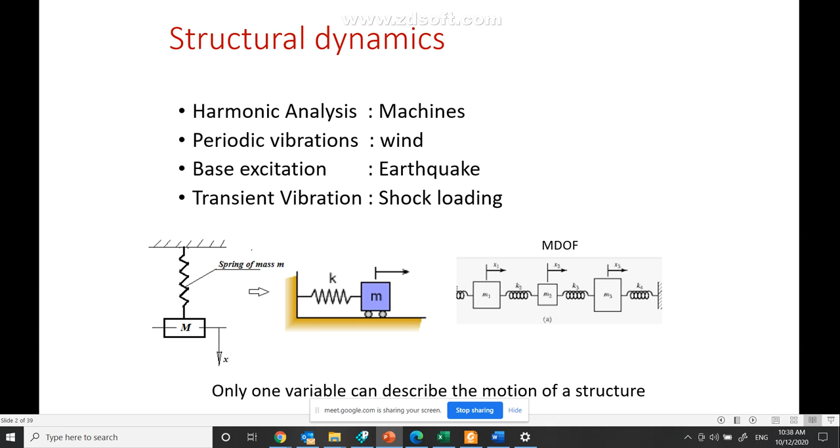If the masses are more and springs are more than 2 masses and 2 springs, then we define it as a multi-degree freedom system.

Now the classic example of a single degree freedom system is an elevated water tank, which we have shown in the example. If it vibrates, it can move on the right hand side, it can move on the left hand side to a given amount of vibration. This movement can be represented as a spring mass system.

The mathematical model of this elevated water tank is a spring mass system where the mass is moving left and right. The assumption is the mass is situated at the top and the column has only stiffness. The column mass is negligible compared to the mass of the water tank. So we have a spring which gives the column stiffness and the elevated water which acts like a mass, and that is the way I have represented the spring mass system.

If I look at the free body diagram of the mass system itself, then you can find out the various forces which are acting on the mass.

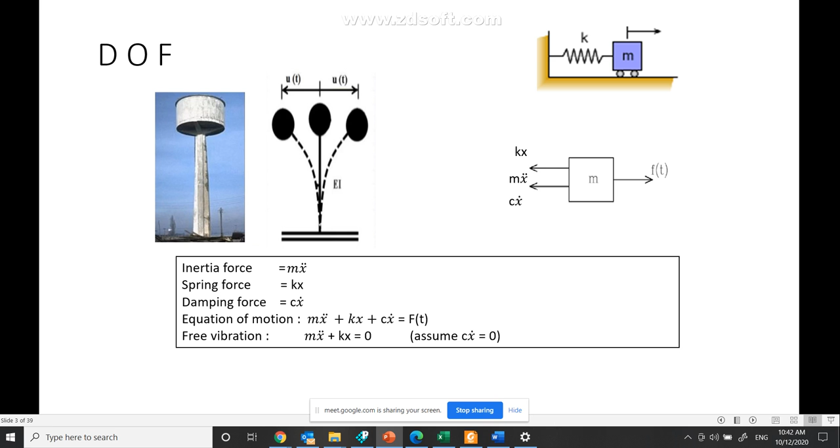Now, if I divide by mass, then I get x double dot plus k by m into x(t) equal to 0.

Now I can assume that omega n is under root k by m. This is a constant I am assuming, and if I substitute it in the above equation, we get the equation x double dot plus omega square x equal to 0.

Here, x double dot and x are functions of time only. And since it is a single degree freedom system, we get only one variable, x. This equation is a simple harmonic motion.

The angular frequency, or circular frequency, omega, is equal to under root k by m, and the unit is radian per second. Similarly, the linear frequency can be written as omega over 2 pi, and the unit is cycle per second or hertz, and the period, t, equal to 1 by f, has the unit second.

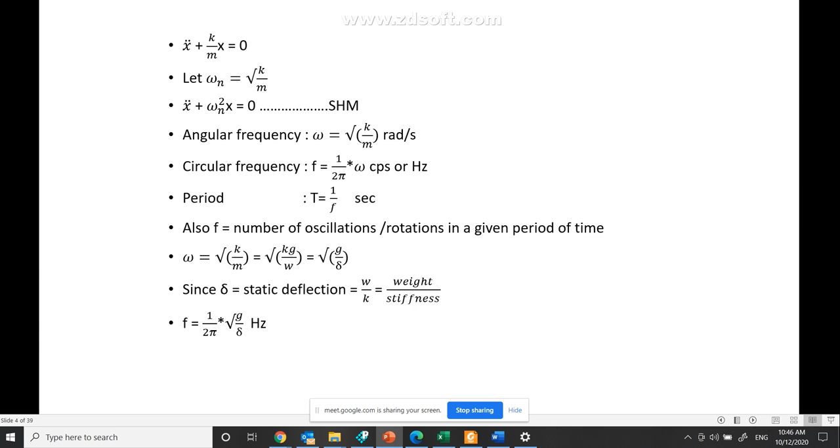Okay. I think there is one slide which is missing, because this is in case of... okay, before you go, there is something.

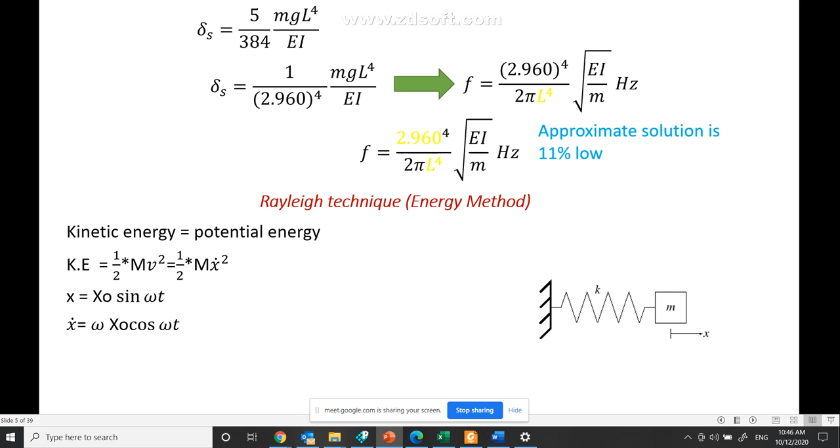Okay, I think there is some problem in slides.

Determine the fundamental frequency. For this problem, the concentrated weight given is 7,000 pounds at the mid span. So we can find the mass, which is weight divided by G, which comes out to be 18.12 pound-second square divided by inch.

The stiffness can be written as 192EI over L cubed, which comes out to 288 into 10 to the power 3 pound per inch. The circular frequency omega is calculated as square root of K by M, equal to 126 radians, and the frequency can be given as the period equal to 0.05.

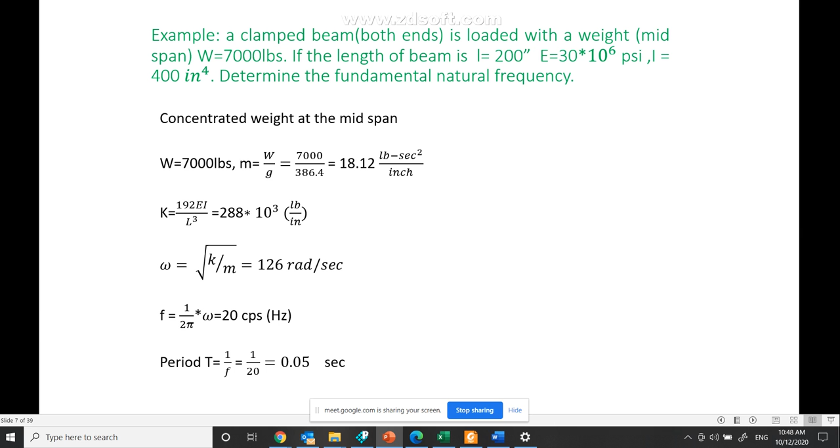In this case, it is assumed that the clamped beam has stiffness only, and the mass is concentrated at the center point, which is nothing but the weight. So we can calculate the frequency.

Now we are trying to calculate — normally the equation I wrote is for a single degree of freedom system. In a multiple degree of freedom system, the equation becomes a mass matrix multiplied by the acceleration vector plus a stiffness matrix multiplied by the displacement vector equal to 0. This is the equation of free vibration for a multi-degree freedom system.

Using the finite element computer program, we normally calculate the masses as a lump mass or consistent mass. So we should know: if I am using the lump mass system, what is the frequency? If I am using consistent mass, what is the frequency?

This example I am showing is a bar, not a beam, shown as a vertical force. It's a bar which has a lump mass, and I am considering only one element.

So stiffness of the bar is AE over L, with matrix 1 minus 1, minus 1, 1, times U1, U2, where U1 and U2 are the deflections at node 1 and node 2. Similarly, the lump mass is equal to omega square into rho A L by 2. Rho A L is the total mass of the bar — rho is the density, A into L is the volume, and volume multiplied by density is the mass.

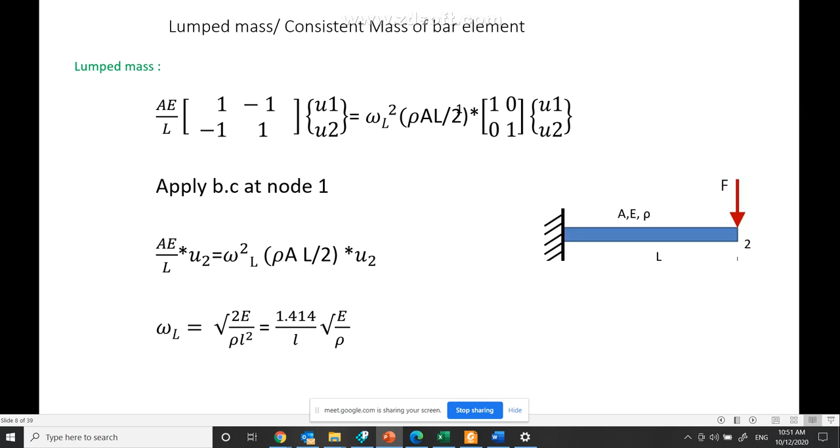By applying the boundary condition, we get this equation, and from this I can find omega, the circular frequency, when using the lump mass system: 2E over rho L square, which is 1.414 divided by L times square root of E over rho, the mass density. We can go to next.

Now, if I use a consistent mass, I only have to change the mass matrix. The stiffness remains the same. This is again a standard eigenvalue problem, where stiffness into the displacement vector equals omega square times mass into the displacement vector. So the consistent mass is rho A L over 6, with matrix 2,1,1,2, times U1, U2.

If I apply the boundary condition at node 1, the first row and first column from both sides are deleted. If you delete that, you get the equation AE over L multiplied by U2 equals omega square times consistent mass matrix. The frequency you get corresponds to using the consistent mass.

Rho A L divided by 6 multiplied by 2 multiplied by U2. From the omega consistent, I can calculate it, which is 1.732 divided by L, times square root of E over rho. The exact solution for a fixed free bar is 1.571 divided by L, times square root of E over rho. Thus, this shows that consistent mass overestimates and the lump mass matrix underestimates the natural frequency.

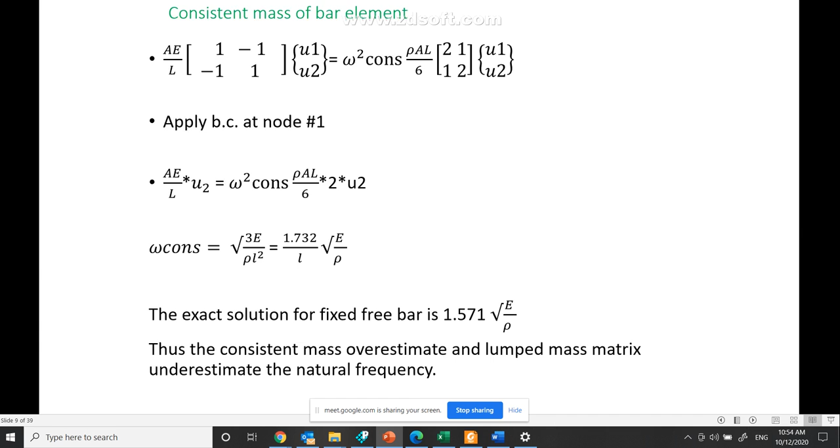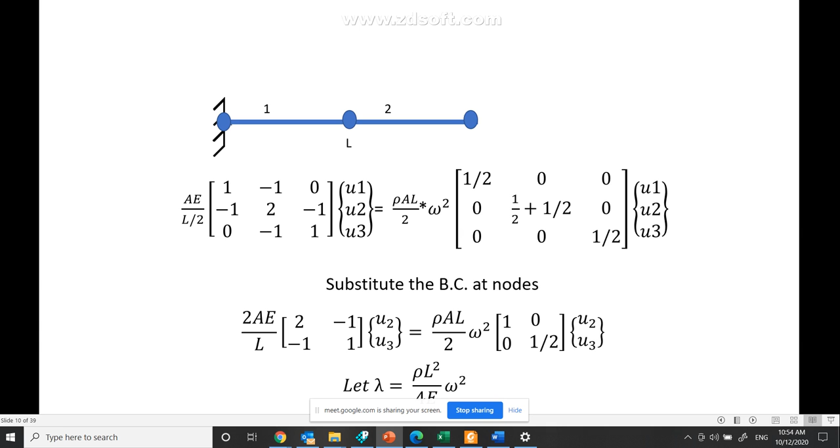Now I can use two elements, and the same kind of conclusion can be drawn. Here the two-element stiffness matrix is shown, and on the right hand side, two element mass matrices. Now the first row and first column are deleted from left and right. You get two equations here, and if I solve that equation...

If I solve this equation, I get omega 1 and omega 2, which are 1.531 and 3.695. The first fundamental is lower and the second fundamental is higher frequency.

Now, one thing is clear: if I want to have one frequency, then even the entire bar can be modeled as only one element. If you want more than one frequency, you have to use two elements for two frequencies, three elements for three frequencies, four elements for four frequencies. For higher modes, if you use a large number of elements, you will get frequencies more than one, more than two.

Similarly, using consistent mass with two elements, applying the boundary condition at node 1 in the same way, and assuming lambda equals rho omega L square divided by 24E. If you substitute it, then you can calculate.

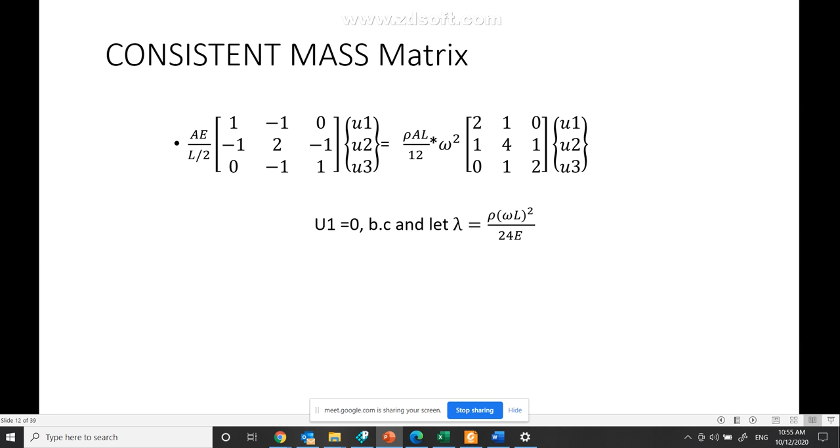Lambda 1 equals 0.108, lambda 2 equals 1.32. And omega 1 you can calculate as 1.61, omega 2 as 5.63, and the exact one is i times pi over 2L, times square root of E over rho, where i equals 1, 3, 5, 7 up to infinity.

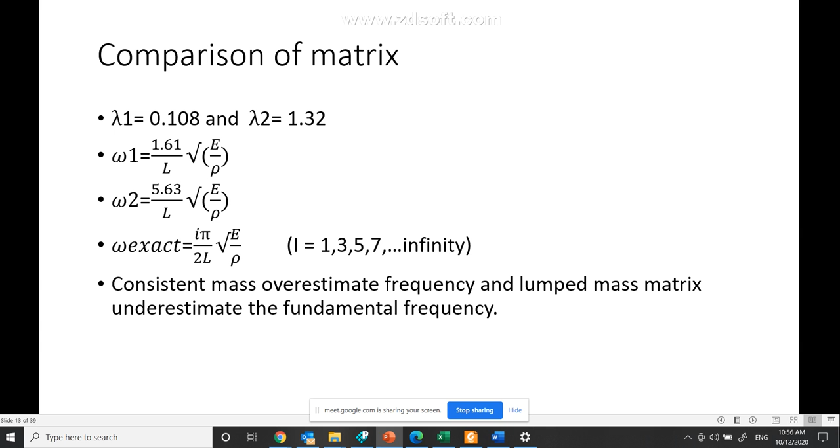This also shows, for two mass matrices, if I assume two elements, it also says the same thing: the consistent mass overestimates the frequency and the lump mass underestimates the fundamental frequency. This is true in case of one element or higher number of elements in a bar element.

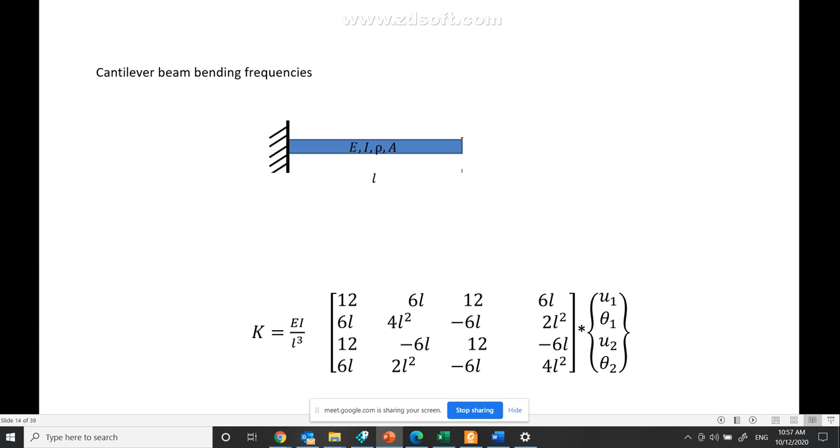Next, if I take a beam element now, instead of a bar, using only one element, the stiffness matrix is this. This is a long beam, with each node having a displacement and rotation, 2 degrees of freedom per node. So we have a beam with two nodes, one element, giving a 4 by 4 stiffness matrix and 4 displacement vector: u1, theta1, u2, theta2.

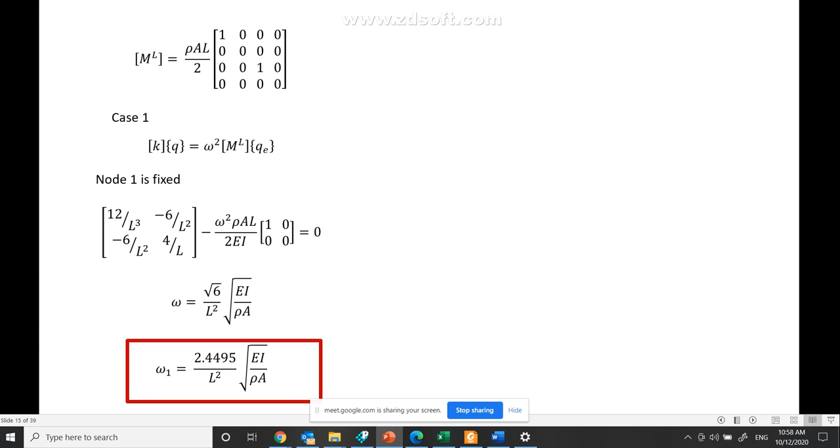Similarly, I can write down the lump mass for two elements for the entire beam. The case one equation is basically for lump mass, which is the standard eigenvalue equation that I told earlier I would explain. If I eliminate the node 1 degrees of freedom, u1 and theta1, we get the equation omega equals 2.4495 over L square, times square root of EI over rho A. This is the first fundamental frequency you get.

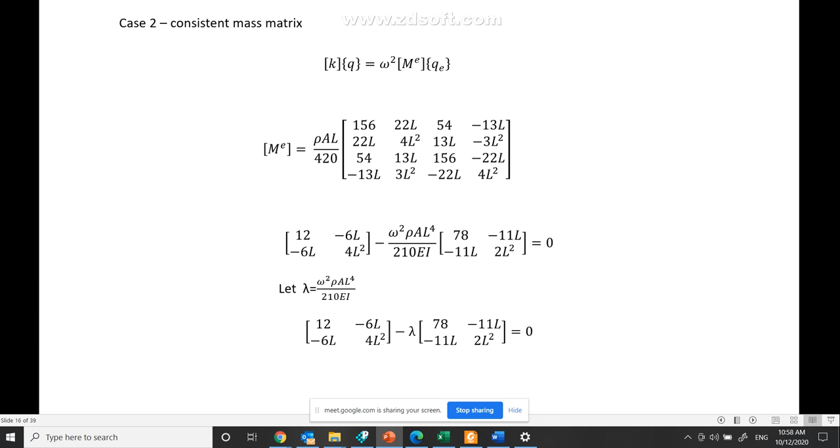If I take the consistent mass matrix instead, the only change is the mass matrix, and eliminating at node 1 u1 and theta1, you get this equation. And if lambda equals this assumed value, then the equation for eigenvalue can be found out.

Lambda 1 is equal to 0.059, 5.769, and then omega 1, omega 2 we can write down. The exact value is 3.52 L square. This is the exact value if you take a beam problem, for the first fundamental frequency.

So this also shows that the consistent mass slightly overestimates the frequency, and the lump mass underestimates the fundamental frequency. This is true whatever structure you take. Lump mass is easy to consider, and normally in calculation lump mass is used. But if somebody wants you to use consistent mass, you can use it, there is no difficulty. One should just realize that the fundamental frequency will be overestimated if consistent mass is used.

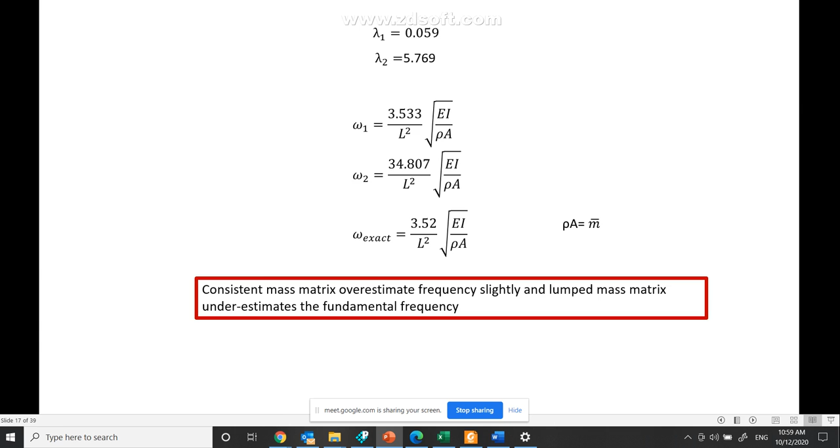Many times in the industry, particularly in petrochemical industry, you will find a column or vessel, which is a thin and tall vessel fixed at the ground structure, and we are supposed to know the fundamental frequency of this structure.

So for this, the best way of calculating the fundamental frequency for this mechanical system or equipment is to calculate the period, which is defined as 1.79 root of wL to the power 4 over EIg. It is based basically on static deflection.

This is based on a UDL cantilever beam. Since it is a thin vessel, I is the moment of inertia of the cylindrical vessel, assuming R is the radius of the cylinder and T is the thickness, so pi R cube T is nothing but the moment of inertia.

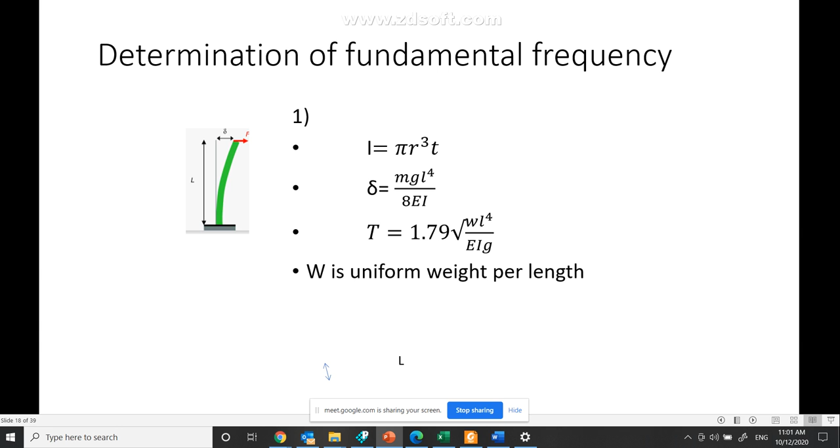So from this, once we know the period, we know the frequency. Since the period is known, the frequency is known, and then I can find out the acceleration. This structure, meaning the mass, is attracting this much acceleration when an earthquake takes place.

So what is the total force? If W is the weight of the structure, the maximum force can be 1.5 times W by G multiplied by the acceleration we got from the spectra. The 1.5 factor accounts for the higher mode effect, since the frequency calculated is only the fundamental frequency, but the structure has a number of other frequencies, so I multiply by 1.5 to account for them.

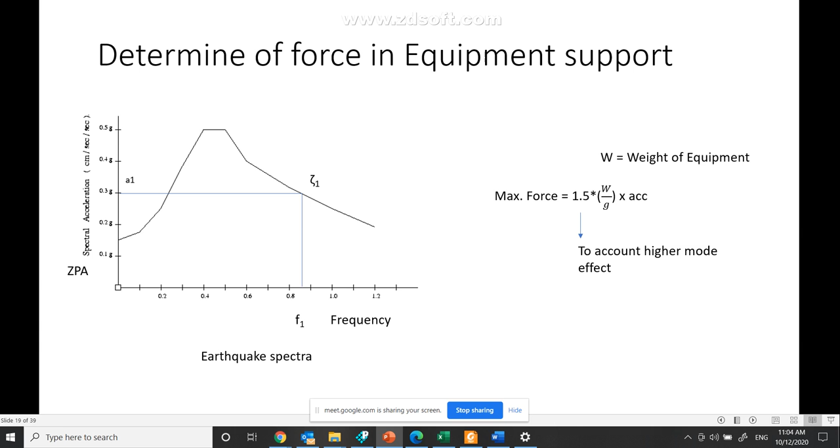Okay, next we can go to the next case. Many times we have a saddle supported vessel in the industry. This can also be converted into a single mass and spring system, and one can calculate the static deflection. From the static deflection, you can calculate the period, and from the period you can find the frequency, and then calculate the force coming at the base of the support of the two saddles.

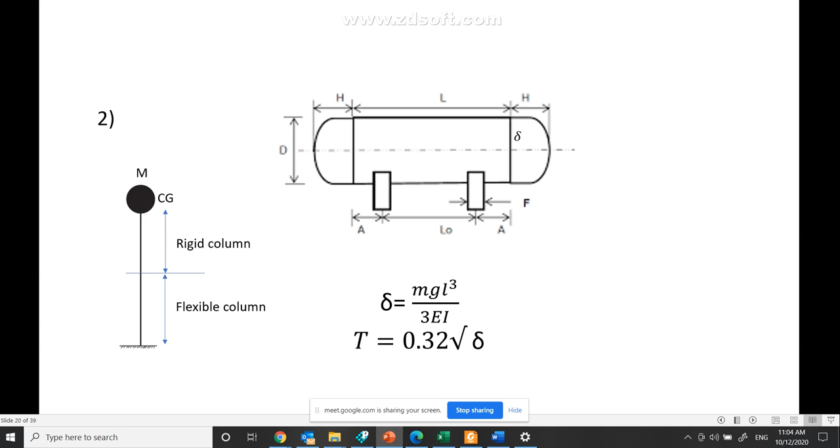Next, we have a skirt-supported vessel. This is a vessel which has a skirt at the bottom, fixed at the bottom, at the skirt level.

This also has a period formula given as 7.65 times 10 to the power minus 6, H over D, where H is the height of the vessel including the skirt, D is the diameter of the vessel, and under root of W D divided by T, where W is the weight per unit length, D is the diameter, T is the thickness of the vessel.

Now here the weight per unit length includes the metallic weight of the vessel, insulation weight, plus the content inside the vessel—whatever you are keeping in it—all converted into weight per unit length. From there you can calculate the period, calculate the frequency, calculate the forces, and then design it.

If you have a leg-supported vessel, the same principle can be applied.

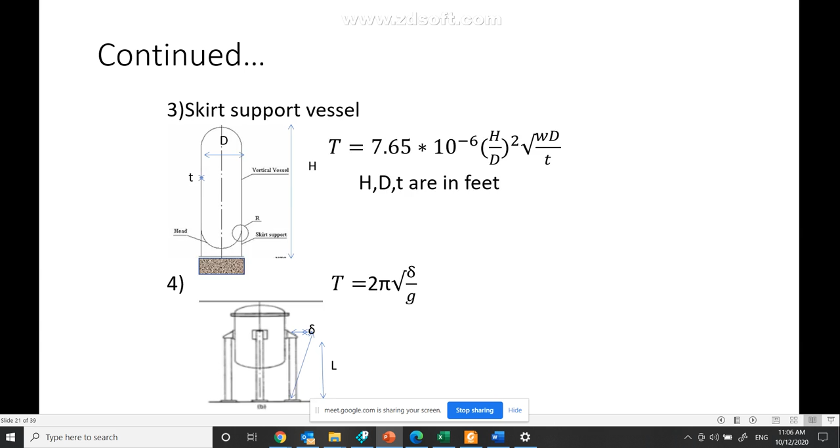This is an elevated tower where the period can be given as 3.63 W L cube over E I, where the 3 I have taken outside—that is the reason why we get 3.63.

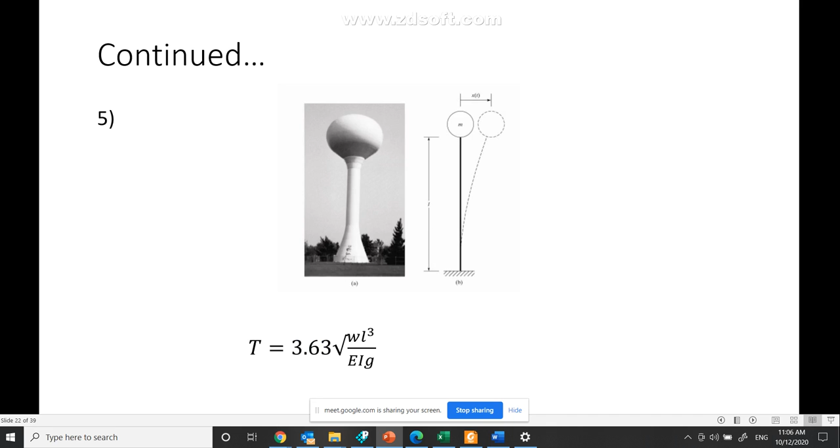Now we are going slightly more in detail about earthquake excitation. If I have a single mass degree of freedom system, which is nothing but a column having a load—the weight of the water tank at the top—and if earthquake occurs, and this is connected with the ground, and the ground means it is connected on the rock side. Below the column we have rock, so that is the reason I am assuming it is fixed. But if you have soil, then I can model it as a soil stiffness spring-mass system.

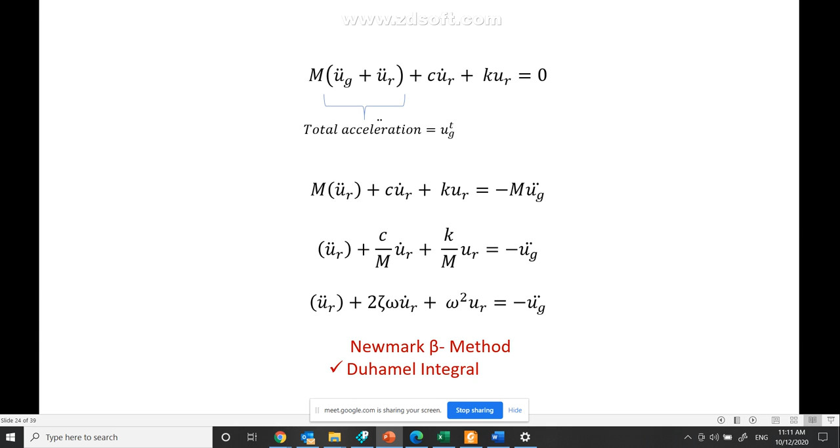Duhamel integral is normally used in almost all codes, because it can be used to integrate closely. If I integrate it, I get a velocity which is the integral from 0 to t of uniform acceleration, e to the power minus zeta omega times t minus tau, sine of t minus tau, d tau.

And if I integrate again, I get the displacement. This gives a displacement versus time plot, which varies with time. If I take only the maximum value, I can write u as a function of time maximum value, which is written as SD of omega and zeta, a function of both frequency and damping.

And SD is known as the spectral displacement. Similarly, I can define spectral velocity and spectral acceleration, and all three are related by omega.

We can relate and express the spectral displacement, spectral velocity, and spectral acceleration. The total acceleration will be obtained if I add the uniform acceleration, because this is the relative one.

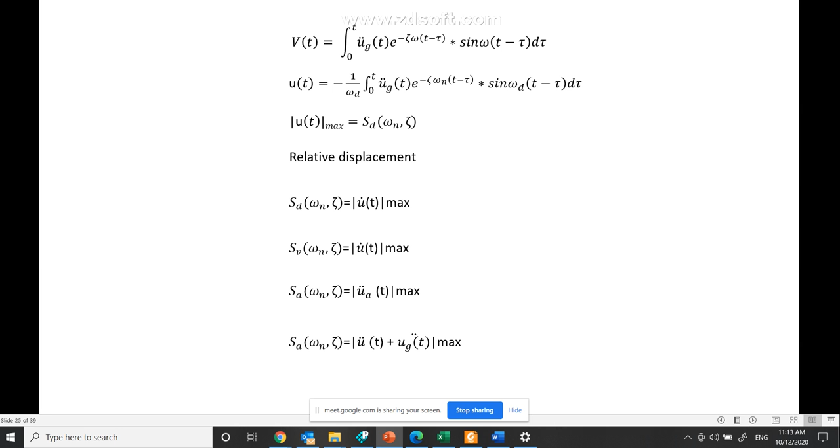Now I am showing one example of how to solve a single degree of freedom system earthquake design problem. I have a single degree of freedom system, mass located at the top, like an elevated water tank. It has a stiffness and a mass.

The length of the column is 14 meters. The mass is 40,000 kg. The E value is given, and the I is also given. We can get EI by multiplying E into I.

The ground spectra is defined. Normally it is given in the form of acceleration versus frequency, but here I am writing an equation representing a spectra for a given damping of 5%, which is SA over G equal to 0.1 plus T divided by e to the power 2T. This is defined in the form of an equation.

So I can use this equation to calculate the acceleration for a given period. This is already given for a damping value of 5%. If you have 2% damping, it has to be increased, and the code gives the factor by which you should multiply to go from 5% to 2% damping.

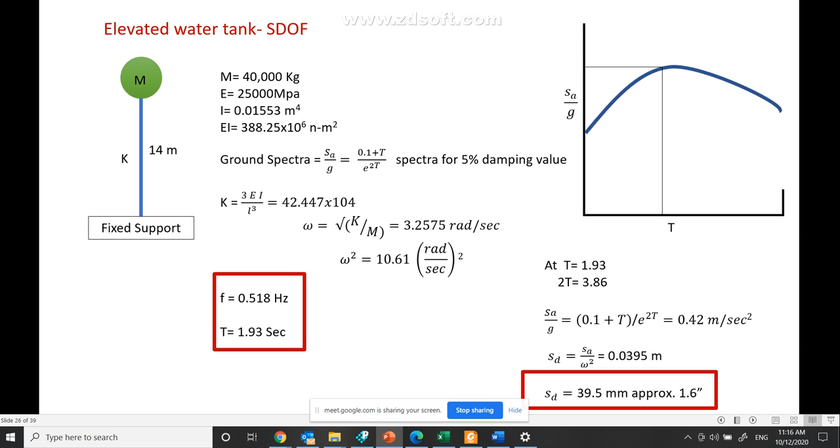SD comes out to 39.5 millimeters, or this much in millimeters and this much in inches. This is the movement represented by SD, meaning the maximum displacement of the mass, for a single degree of freedom system this is the maximum displacement of the mass.

Now that acceleration we got, I multiply the mass by the acceleration to get the force acting. From onward, once we know the forces, it is a strength of materials calculation. There is no more dynamic calculation now.

So simply the base shear is the same, and the bending moment is the force multiplied by 14 meters. Z, the section modulus, is I over C, which I can find out, and the bending stress sigma equals M by Z, which comes out to 7.57 MPa.

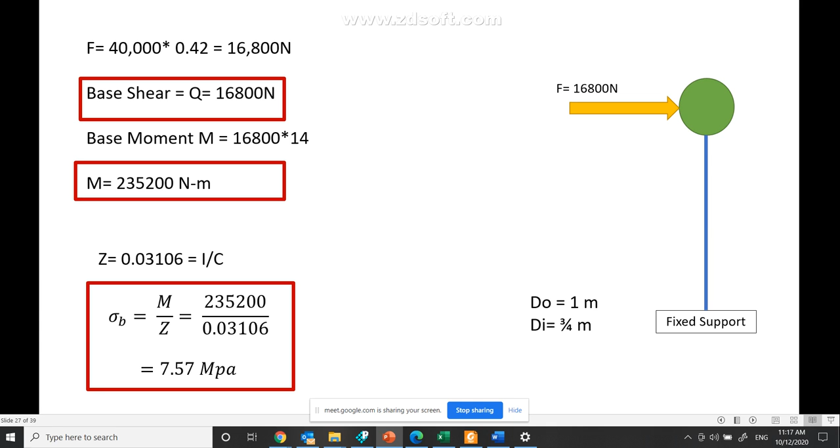So this is a very simple way of doing an earthquake design of a structure with a single degree of freedom system, because the entire mass, which is 40,000 kg, is moving left and right at the top.

Now something about Indian Standard 1893, which is nothing but the earthquake code as per our Indian standard. There, they design a seismic coefficient AH, which is nothing but Z by 2 multiplied by I by R, multiplied by SA over G.

AH is the seismic coefficient. You will find what the seismic coefficient is and how it is used. Z is nothing but the zone factor. The entire India is divided into 4 zones, and the Z value is defined at each zone.

If it is a residential building, then I is one number. If it is a school building, then I is higher than a residential building. If it is a police station, it is a higher number than a residential building. If it is a cinema hall, depending on how many people accumulate there and how much risk there is if the structure collapses, the importance factor of the structure is defined accordingly.

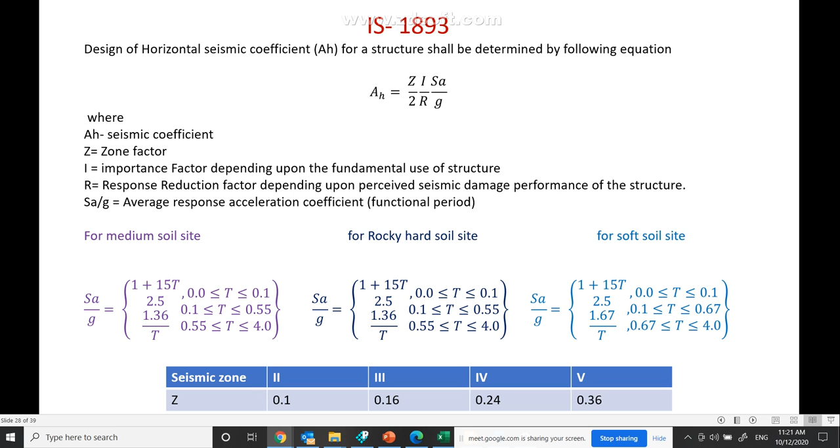The zone factor for zone 2 is 0.1, zone 3 is 0.16, zone 4 is 0.24, and zone 5 is 0.36. This is the Z value defined.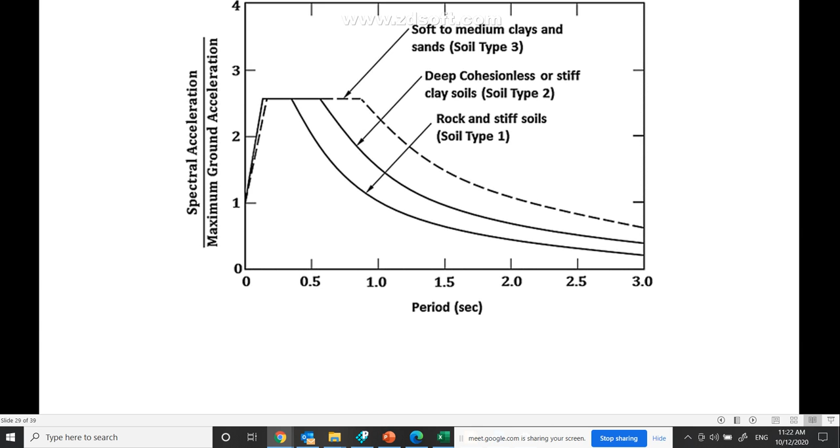Normally, for civil structures, acceleration is defined with respect to period; they call it a spectra for 5% damping. But for mechanical equipment, we define on the y-axis acceleration, and on the x-axis frequency, not period. For mechanical equipment, we always define spectra as acceleration versus frequency. For civil structures, they define acceleration versus period, because civil structure people are very comfortable with period. Although both are the same.

Design base shear, which is nothing but VB. So we calculate AH. Once I know, suppose a tower is built as a single degree of freedom system and is situated in Mumbai, then we know R is defined.

What kind of structure is there? We find the forces. So Z is known, I is known, the importance factor is known for an elevated water tank, and R is also known. And if we assume rock is below, then we fix SA over G, also known. Using all these things, we can calculate AH.

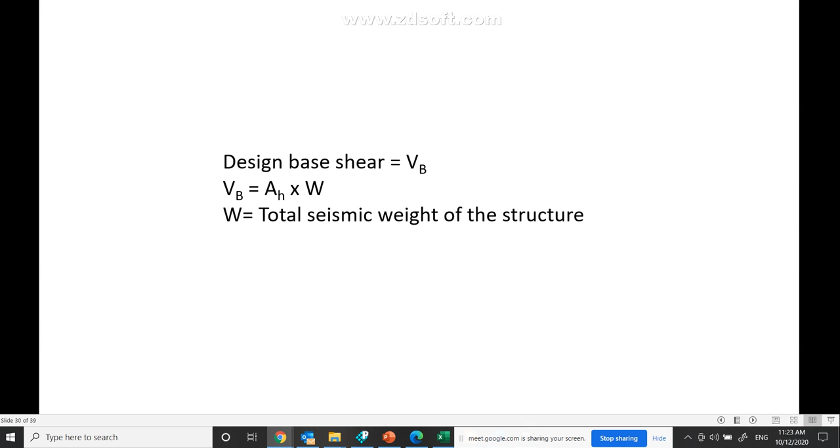Using AH, if I take the mass of the structure, the weight of the structure W, then the base shear can be given as AH multiplied by W, which is nothing but the total seismic weight of the structure. So this is the equation used in calculating the base shear, and then the base moment can also be calculated.

The equation of motion for a multi-degree freedom system, instead of one, it is a matrix now. It is a mass matrix, acceleration vector, the damping matrix, the velocity vector, plus stiffness matrix, displacement vector, equal to the mass matrix into the vector of unity multiplied by the ground acceleration.

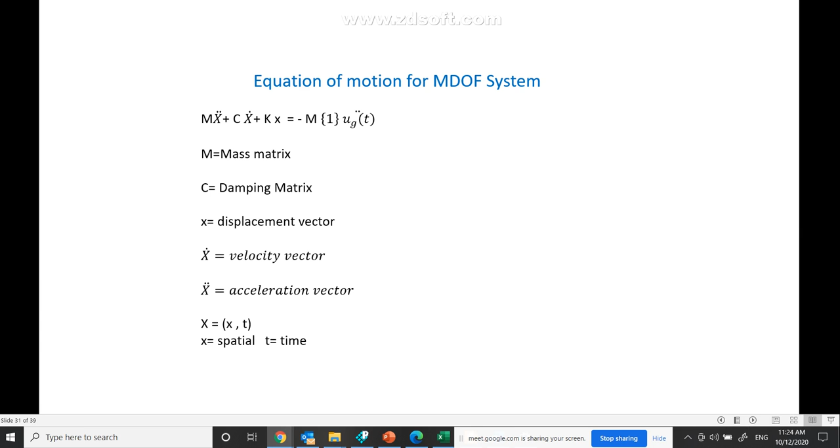Okay, this is the equation, and now here the x is a function of space and t. It is a function of x and t, both. So therefore, if I want to solve this, in the same thing we can do, I can solve it using multi-degree freedom system.

But if I want to calculate the first fundamental frequency, then I can assume a mode shape, how it deforms in the first fundamental, which is nothing but the static deflection. What is the shape of static deflection of a structure?

So if I assume the static deflection, now I am assuming u(x,t) equal to, it is a function of psi(x), which is nothing but using separation of variables, multiplied by u which is a function of time. One is a function of x, another is a function of time.

And the function of x part, which is nothing but the mode shape, can be written as 1 minus cos(pi x divided by 2L), in such a way that it satisfies the boundary condition. What is the boundary condition?

At x equal to 0, it is 0. And at x equal to 0, again the rotation, the u dot is 0. Both u and u dot are 0 at x equal to 0, because it is fixed at the ground.

Now, this mode shape is satisfying this boundary condition, both the displacement boundary condition and rotation boundary condition. If it is there, then I can use the Rayleigh quotient.

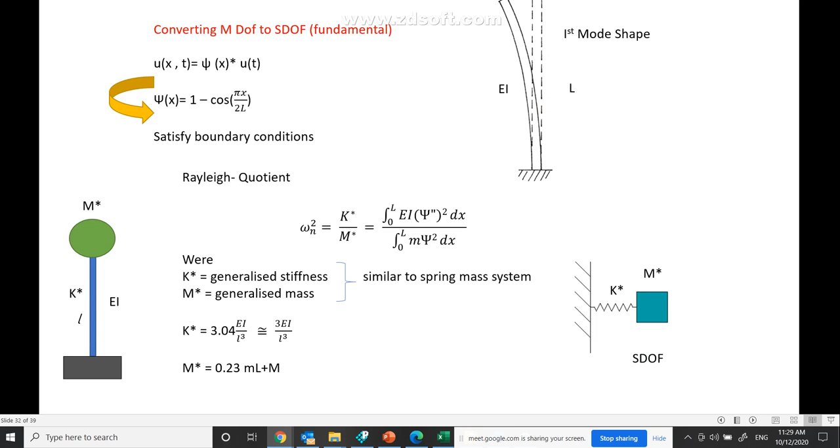And next, we can calculate the frequency using these two. We can calculate, and simply the frequency and period can be calculated, and the forces can be calculated.

This is a harmonic vibration example we are seeing, how to solve a harmonic vibration. So in that I am showing here, we have a cantilever beam, on which we have a machine producing a force F equal to 200 sin(6t). This is the excitation, the force.

The cantilever beam has a mass of 2000 pound second squared per inch. This is the mass we are having. Length of the beam is 100.

E is defined, I is defined, area of cross section is defined, and the length is defined. The width of the beam is 6 inch, depth is 12 inch, xi is equal to 10% of critical damping.

If suppose the machine is not mounted on the cantilever, then the cantilever is going to deflect under the load. The deflection under the load, we can also calculate it.

So now, once we model it, we can calculate the stiffness 3EI over L cube. You can get the number omega equal to K by M. We can get 1.0 hertz. Static deflection we get 0.0024. And initial condition is static deflection is this and velocity is 0.

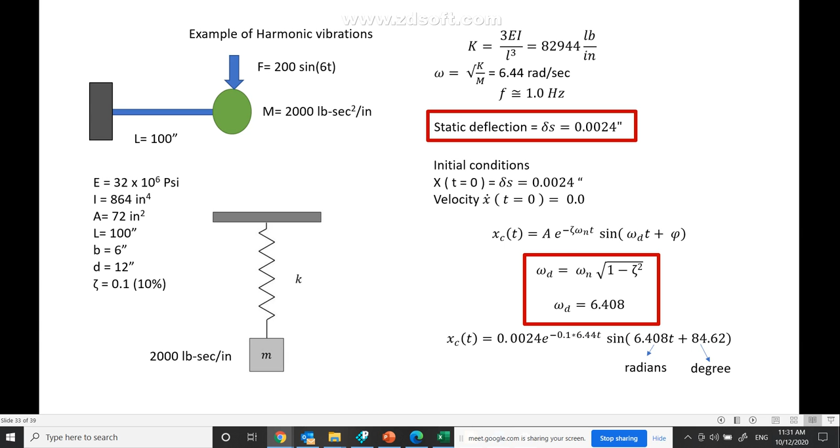Next, if you solve by finite element method, using FEA, I get these two curves. One is an analytical solution, the other is an FEA solution. So they match very well. So you can solve a single degree of freedom system harmonic motion easily.

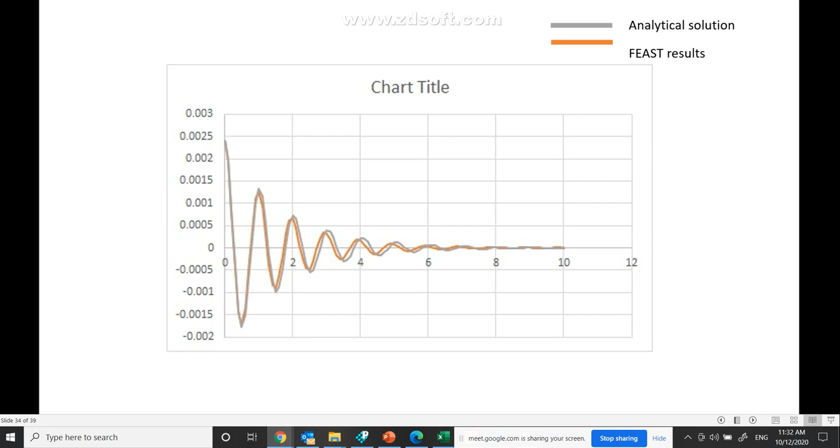Similarly, you can solve a multiple degree of freedom system also. This is the single degree of freedom system we are talking about. Now, in the last part, we will be talking about the multi degree of freedom system. Here I have taken two masses, two springs.

The stiffness of the column, both columns is the same. Length is 100 inch, and the mass is defined by 6,000 pound and 3,000 pound. So we can find out the solution for this problem.

Since it is a multi-degree system with two masses and two springs, in the last lecture we calculated the stiffness matrix after doing condensation of theta 1 and theta 2. Two rotations were removed, and a stiffness matrix in terms of U1 and U2 were calculated, which was 48 EI over 7L cube times 16 minus 5 minus 5 2, for U1 U2. This is the condensed stiffness matrix where there is no rotation at all.

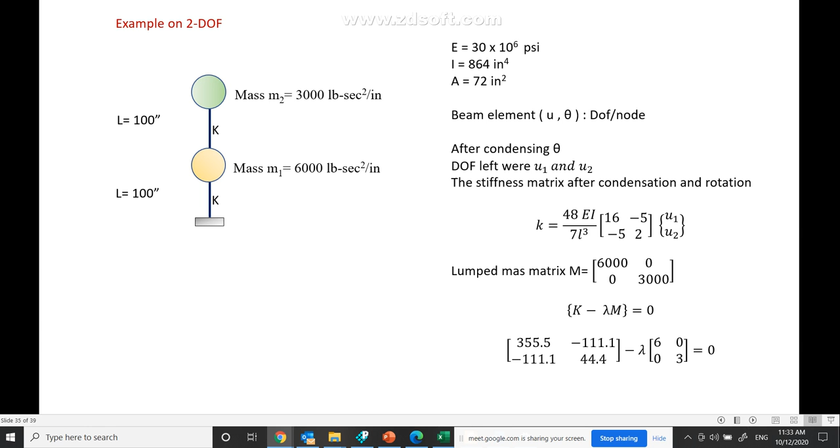If I take this and mass is 6,000 and 3,000, I get an eigenvalue problem, a standard eigenvalue problem, and calculate the frequency and mode shape.

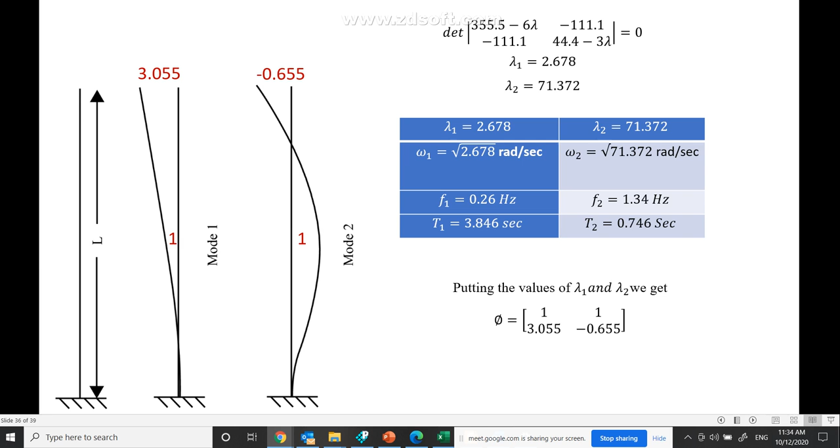Now this is the equation. Further, if I continue further, it is going to take a lot of time. So I will be reducing the time by doing some simplified calculations, which I have described here.

So we get the frequency, two frequencies and two mode shapes. From that, I will use the generalized mass, and using both generalized mass, I can normalize the mode shape. First thing is that you normalize the mode shape. Once you normalize the mode shape, using that equation, I can calculate the acceleration.

In this case also, the acceleration is given as 0.1 plus t times e to the power of 2t, for a given value of damping, into g. So the period we know, we can calculate the acceleration, and we can calculate the displacement because we know omega 1 and omega 2. Similarly, if I multiply the maximum displacement, we get gamma 1 times d1 is y1, and gamma 2 times d2 is y2.

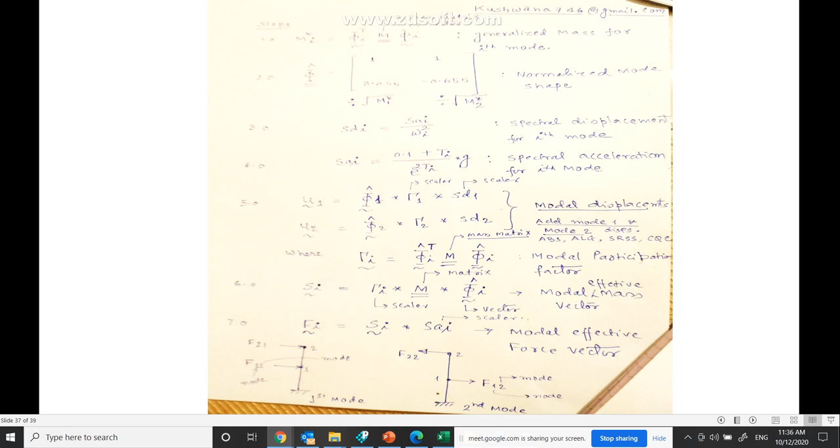Anyone who wants to know further detail with examples, or wants more discussion, can have a discussion later with me. Now there are two problems we are going to solve, which have been described. One is a cantilever beam using FEAST, which I have shown here, and Aniket is going to do the solution.

It is a cantilever beam whose dimensions I have written: length is 80 inches, E is 30 into 10 to the power 6, breadth and depth B and D is 2 inches, and I is calculated along with the cross sectional area. Density is defined as 0.00072723 pound second square inch. So I can calculate EI, the flexure rigidity, and omega 1 equal to 3.52 times flexure rigidity divided by m into length to the power 4. From that I calculate the frequency, omega 1 equal to 64.5 radians, and f1 equal to 10.26.

Similarly, f2 and f3 can be calculated, and the mode shapes are also shown: phi 1, phi 2, phi 3. In most analysis, one has to match the frequency and mode shape when solving using the FEAST program. Particularly for the second mode, there is an empty node with an intersection at 0.783, and for the third mode the intersections are at 0.358 and 0.868. We check how closely we are able to calculate these numbers using FEAST.

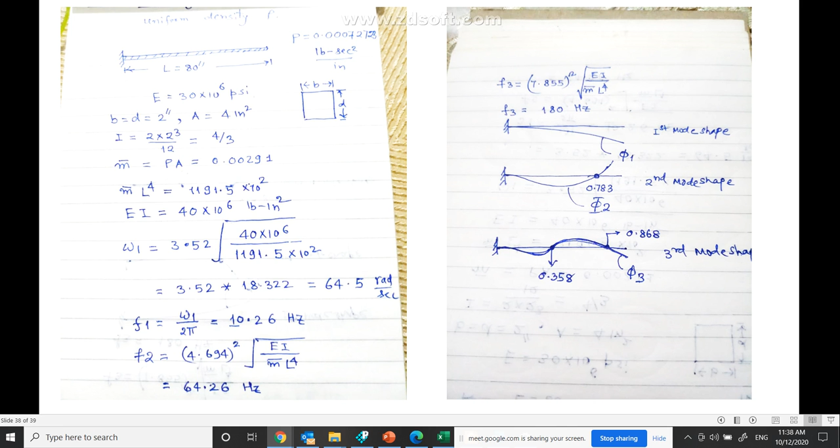The second example is a circular plate, again 80-inch diameter, thickness 1 inch, with E given, mu given, and rho the same. So I can calculate the fundamental frequency using the formula, and this has to match with the fundamental frequency which FEAST is calculating.

Then the frequency has to be seen with the given mode and nodal circle, which will be described in the lecture given by Aniket. Now, Aniket, if there are any questions they can ask; otherwise you can start.

Hello, sir. Hello, sir, Kushwaha sir. Kushwaha sir, yes, yeah.